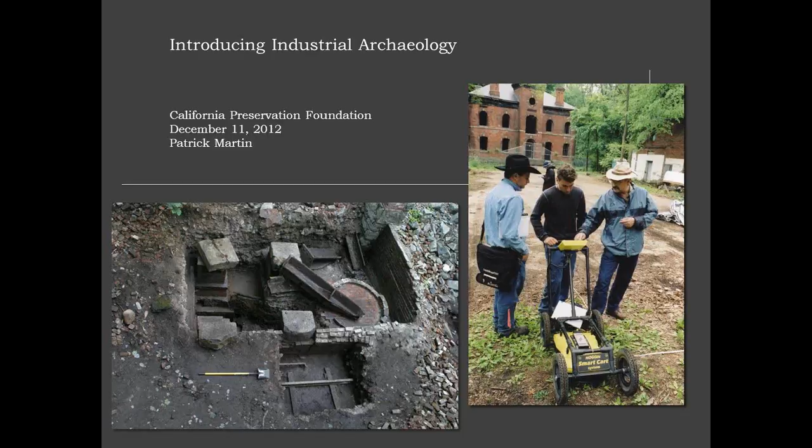Nearly 60 years passed before a serious rebirth of the term in the English-speaking world, in the context of preservation conflicts in England, centered on the destruction of symbols of England's glorious industrial past. One particular battle concerned the elaborate portico of the Euston Station in London, a struggle that galvanized citizens and indirectly led to a flurry of writing and organization around the theme of industrial archaeology.

Another significant development during this period in the 1960s was the creation of the Ironbridge Gorge museum system in Shropshire, centered on the world's first cast iron bridge, dating from 1779, a site ultimately inscribed on the World Heritage List. This preservation initiative was initially focused on standing structures and soon moved to the listing of, quote, 'monuments equivalent of castles and Roman roads,' into the National Registration System.

As early as 1955, the term was used in a publication known as the Amateur Historian, and by 1958 an Industrial Archaeology Research Committee had been created within the Council for British Archaeology, or CBA. A national record of industrial monuments was compiled, largely with the help of interested amateurs, and this new field of study was seriously launched with a number of publications and activities through the 1960s. Out of this grew several regional societies that ultimately affiliated into a national group called the Association for Industrial Archaeology in 1973.

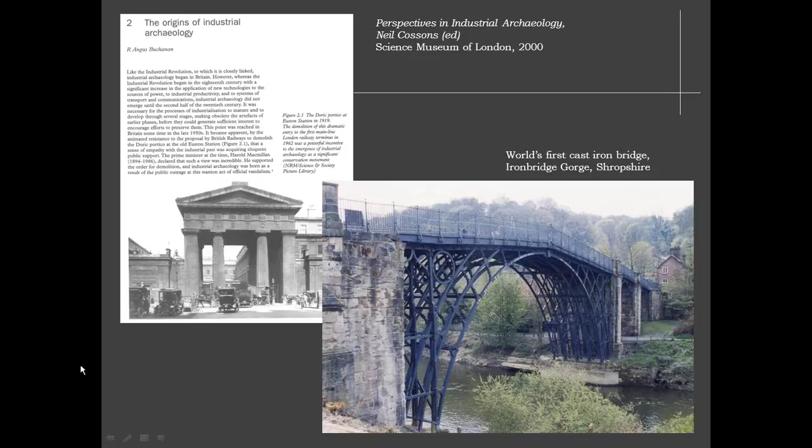I'm failing to make that slide move. Try it one more time with your mouse. Over here. Thank you.

We all know them as HAER standards and guidelines, available on that HAER website. HAER continues to build a massive database of survey and documentation data housed in the Library of Congress, accessible on the Library of Congress website under a collection that includes HAER, HABS—the Historic American Buildings Survey—and the Historic American Landscape Survey documents. These extensive materials constitute a significant research resource accumulated over decades of professional work.

It's no accident that the Society for Industrial Archaeology was founded with substantial involvement from Vogel and others in 1971. This followed closely on the heels of the creation of the Society for Historical Archaeology, or SHA, in 1967, and many of you know about SHA, I suspect. There was serious consideration of simply creating an affiliate of the SHA, but the perceived differences between the two groups, particularly the matter of an SIA focus on preservation and a focus that did not involve digging for one's data, led to the creation of a separate society.

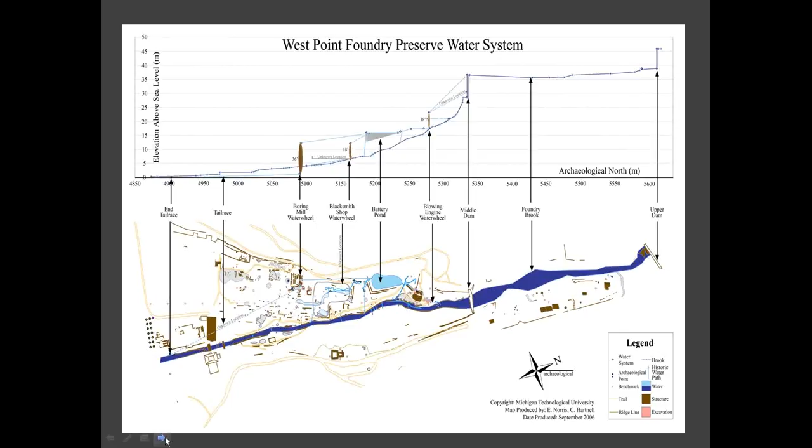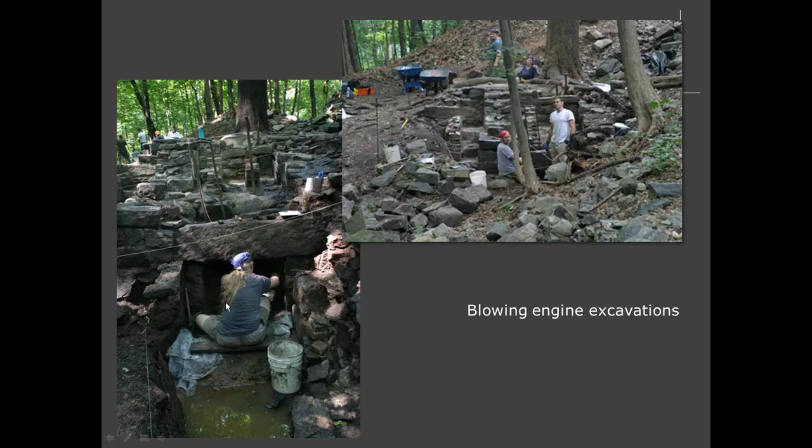Here's a modern photograph of the same area. Notice the little person sitting in this one and in this one for scale.

Subsequent analysis suggests that this arrangement reflects careful management of resources, allowing the wastewater from the blowing engine wheel to be combined with water from below the dam and reused in the boring mill further down the valley. It's actually a reasonable calculation.

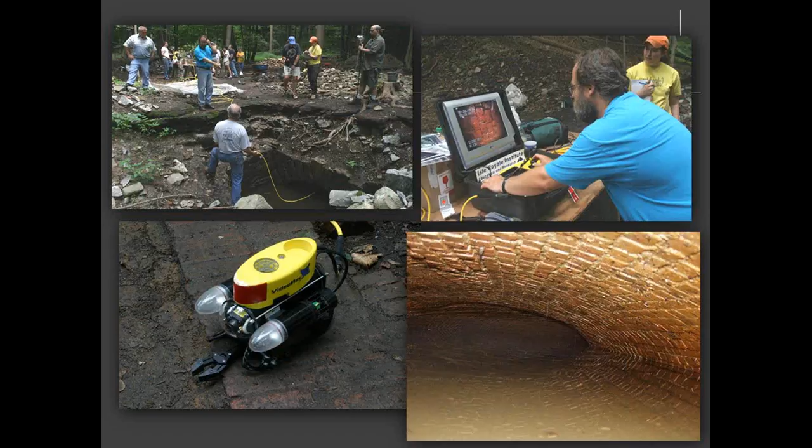From the storage pond, water was fed through an open head race into the boring mill, where it exited off a 36-foot diameter water wheel and flowed back to the Foundry Brook.

But the opening at Foundry Brook was not evident immediately. The detailed topographic survey of the ground surface in the GIS revealed that the input to the tail race was actually at an elevation below the stream bed at its nearest point, making it impossible to drain the water from the mill directly in a straight line.

After excavating the wheel pit, seen here, opening the tail race and pumping down the groundwater, we deployed a remotely operated submersible vehicle and attempted to trace the tail race path. You see some of the images below. After negotiating some turns and 50 feet of passage, we were blocked by root growth.

Meanwhile, we engaged some remote sensing, in this instance using ground-penetrating radar. GPR is an electronic technique that projects electrical impulses into the ground and carefully measures the reflected signals to identify and locate buried objects, soil layers, and disturbances.

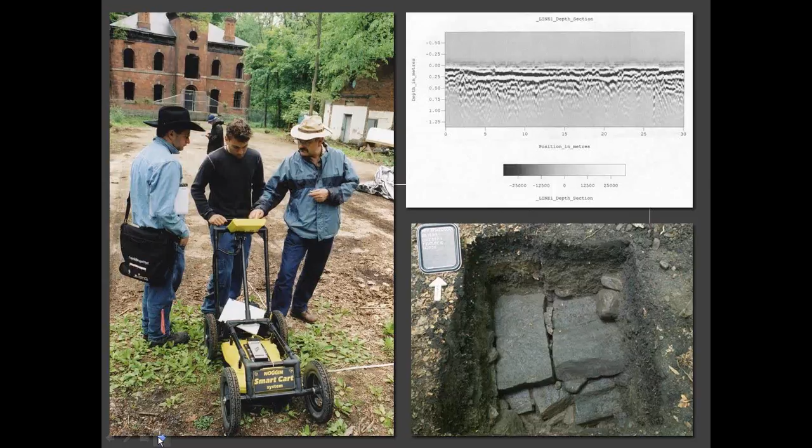The GPR identified anomalies that proved through excavation and observation to expose the nearly 600-foot-long path of this buried tail race, something we never could have done without it. Coupled with limited testing, it also allowed us to identify the extent and locations of a series of buried drains, such as this one here in the lower right.

These virtual views of underground features, followed by excavation, provided significant insights into the structural nature of this ruined and largely obscured industrial complex. Insights that were simply not possible through the documentary record.

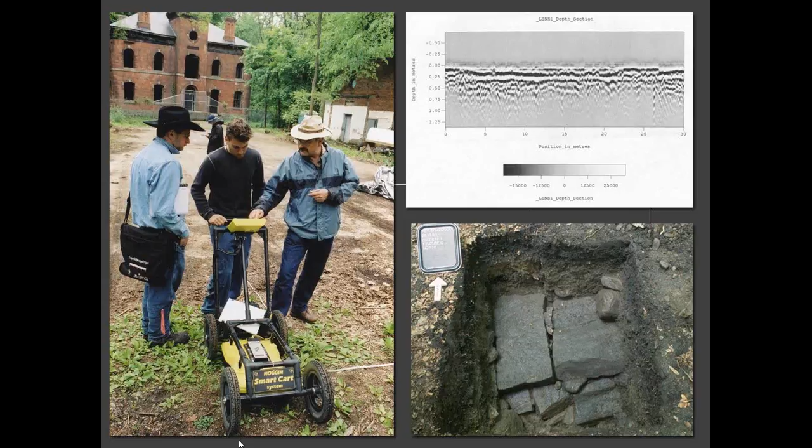In addition to these and many other research questions answered by excavation, this set of techniques has two additional fairly powerful benefits. First, the process of excavation is an excellent tool for public interpretation. Visitors love to witness discovery in real time.

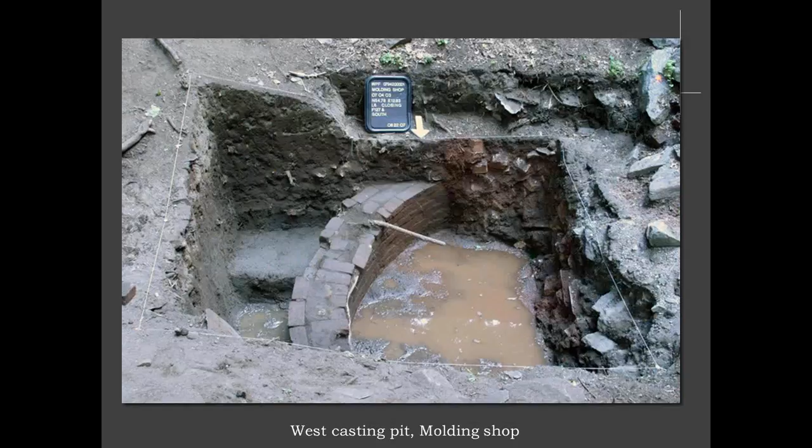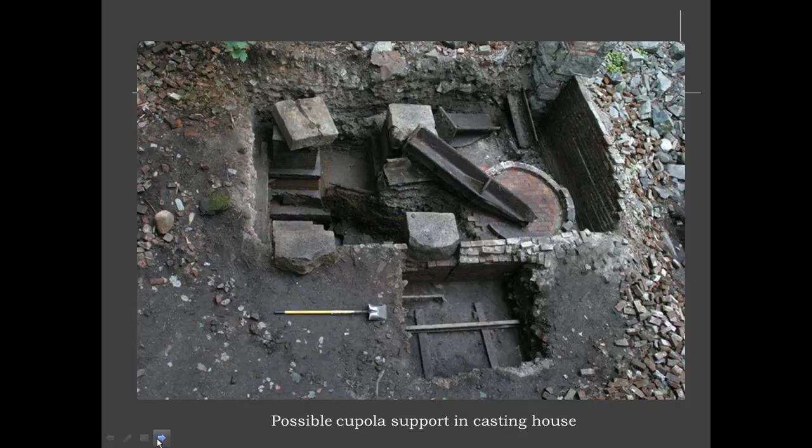First, this work is a classic case in point for that kind of phenomenon where at open house weekends, in the beginning and end of the season, hundreds of local people and citizens from the region visit us daily, fascinated and delighted at the progress. Many people expressed amazement that archaeology, a discipline that relates in their minds to the ancient past, could reveal so much about events of a more recent time and about industrial activities that lay buried beneath their feet.

While historical research takes place in an archive or an office, the active process of excavation opens a window to the research enterprise that is compelling for the public as they seek to understand the background of the industrial past.

The second benefit offered by this kind of excavation is that we simply expose the physical evidence for interpretation. These remains that you're seeing here, the base of a cupola furnace, are at this very moment being incorporated into an interpretive development of this site for the public and for perpetuity.

While simply exposing things is a little more passive than the dramatic and dynamic excavation process itself, revealing these otherwise invisible features is an important part of archaeological research.

In sum, I want to say that IA, and particularly the archaeological practice of IA, employs a powerful set of techniques and perspectives that work in the realm of compliance and in scholarship, both in enlightenment and in preservation. I urge you to embrace those techniques seriously in the future in your own work.

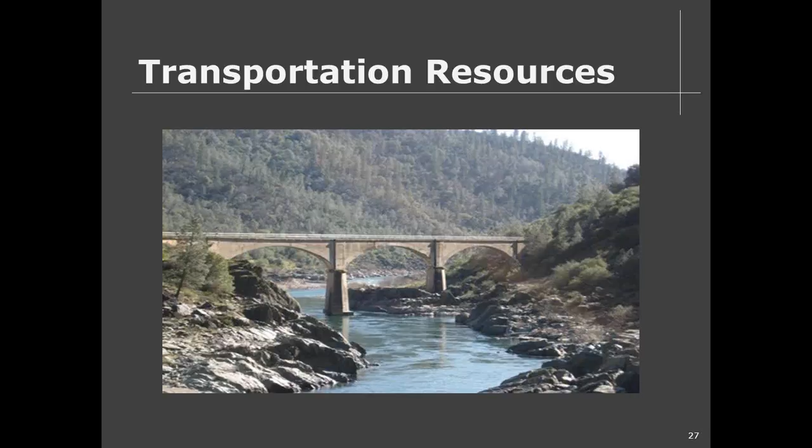Waterborne transportation included ships that went to major ports, as well as river boats that carried goods and people from San Francisco in the earliest years up to ports like Marysville and Sacramento. There's very little left of those transportation systems, and one of the really fantastic examples is the ferry building in San Francisco, which falls into that second category of resources, things built to a very high architectural standard for the purpose of branding, both the city of San Francisco and the ferry systems that used this building.

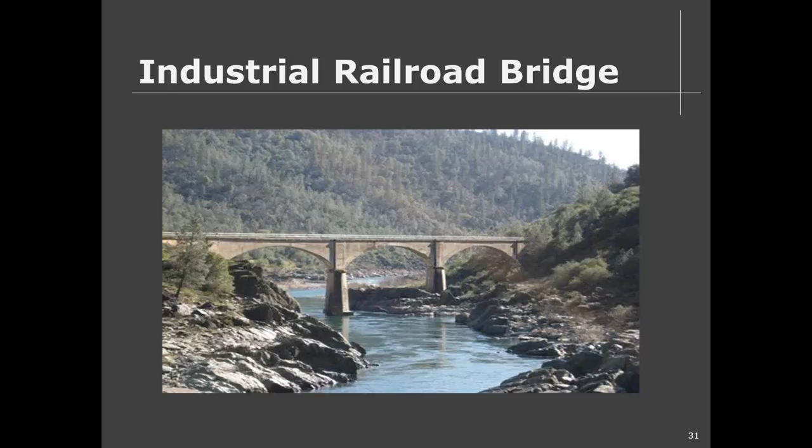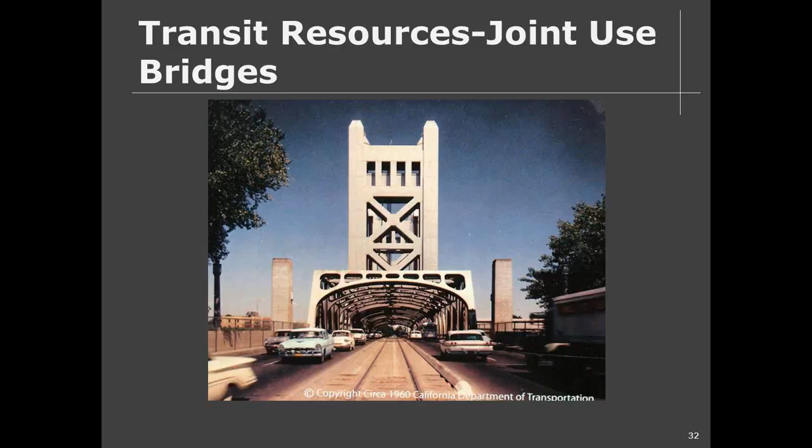Transit systems left even fewer resources behind because the level of durability wasn't the same as with railroads. You do have some—this is the Tower Bridge in Sacramento, about three blocks away from the I Street Bridge. You can see this from the 60s, I suspect, when it still had the Sacramento Northern electrified transit system running down the middle, as well as cars running both directions on the outside. Otherwise, very little remains from transit systems.

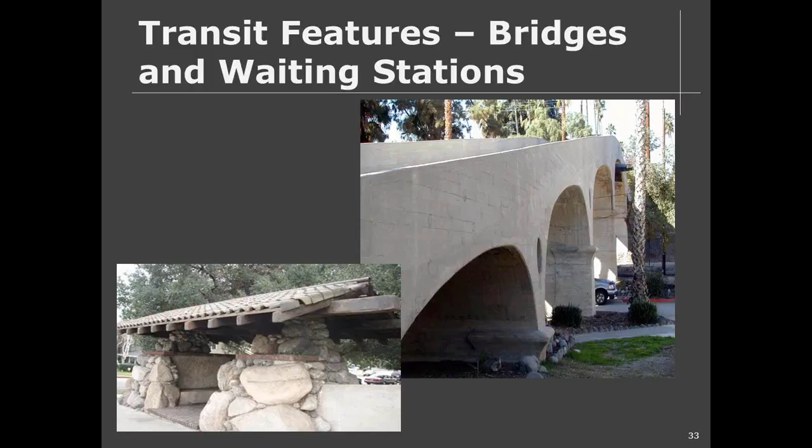The next branch of transportation is highways, which is what you're probably most familiar with—our principal mode of transportation today. Bridges are the most durable and in many cases the most beautiful parts of the highway transportation system.

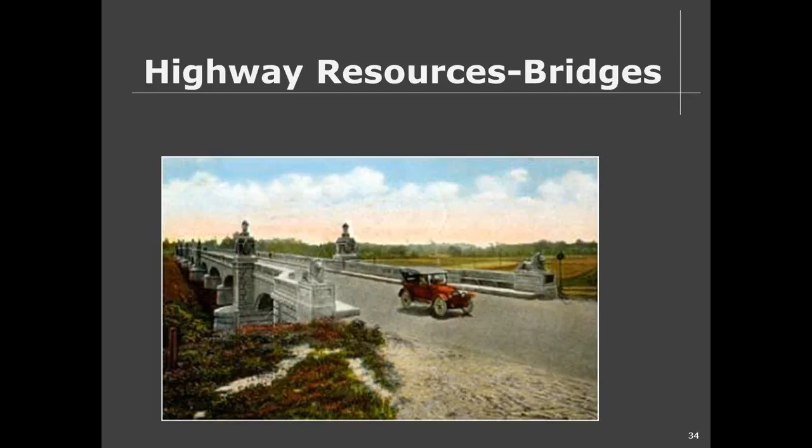This is roughly a 1915 view of a bridge, probably just shortly after it was built. This bridge is still in use and still exists, looking almost exactly the way it does in this picture. This is going across the Tuolumne River in downtown Modesto—a nice bridge. Other durable resources include retaining walls, which include tunnels.

This is the Stockton Street Tunnel in San Francisco, which has some literary merit in the sense that this was the location where Miles Archer was shot in the Maltese Falcon. You have to read the book; this is true.

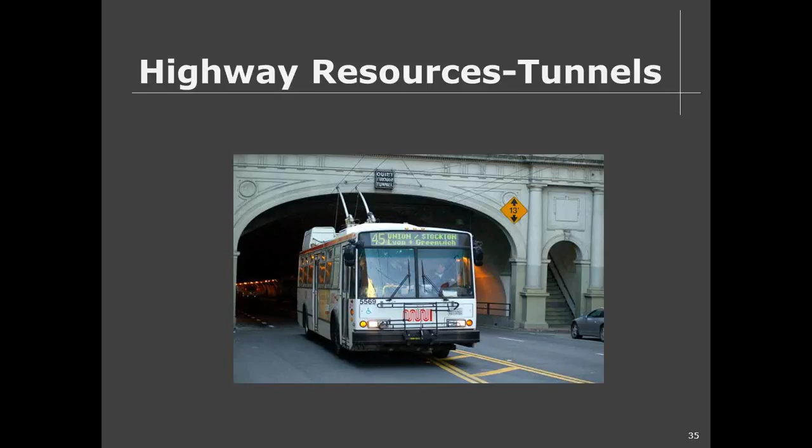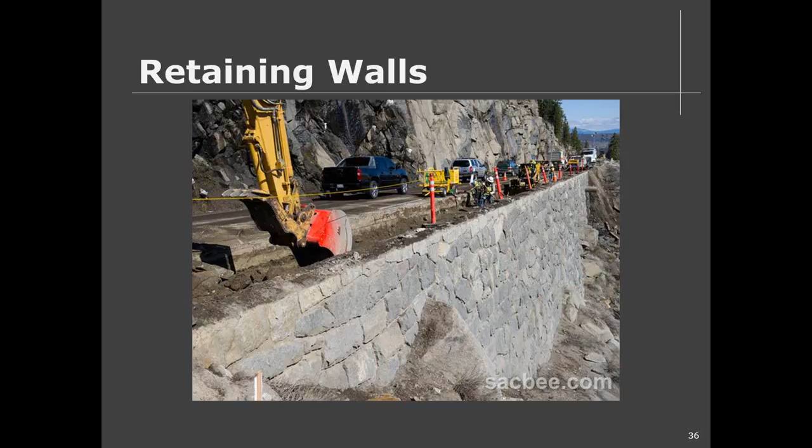Another durable element of the highway system is retaining walls. You don't think much about them, but they're built to last, and they're really very lovely to look at. This is right at Echo Summit, headed down to Lake Tahoe on US 50. Caltrans did a wonderful job of retaining the original stone masonry aspects of the retaining wall while building a big concrete wall behind it, and the structure looks very much the way it did before this repair work was done. Caltrans has done some really excellent work here and there.

So even though transportation resources tend to be found only in isolation, here and there it has been possible to preserve an entire system so that you get the feel of the entire system as well as the function of the entire system. So the question is, how do we retain historic character of a system while providing necessary maintenance? I guess the answer really should have been very carefully, or it's extremely difficult and extremely rare.

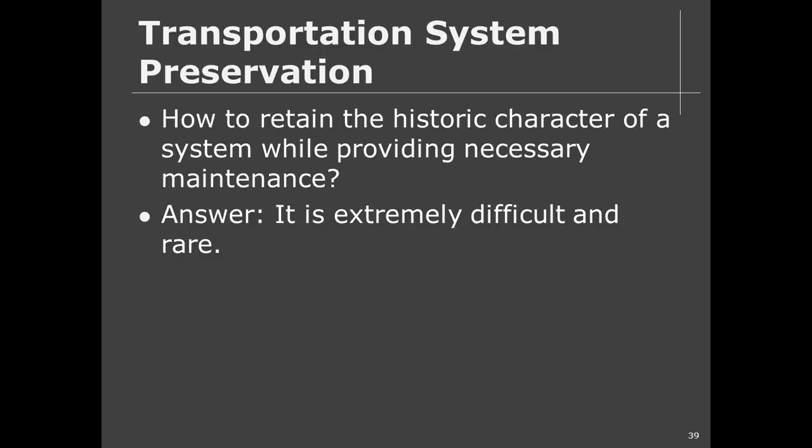I will give you two case studies, one that has been completed and has been highly successful, and that is the preservation of the Arroyo Seco Parkway. The Arroyo Seco, or what's now generally called the Pasadena Freeway, is one of the most important highways in the United States. The Californians say that it was the first freeway. People in New York disagree with that, but it's certainly one of the first true freeways to be built in the United States. It was really a lovely piece of engineering as well as a lovely piece of architecture.

In the last decade or so, Caltrans, the California Department of Transportation, realized that it needed to fundamentally upgrade this facility, from repaving to work on the bridges to the retaining walls, the entire system. Because it had been listed in the National Register, Caltrans decided to do the right thing and rehabilitate it consistent with the original design of the resource.

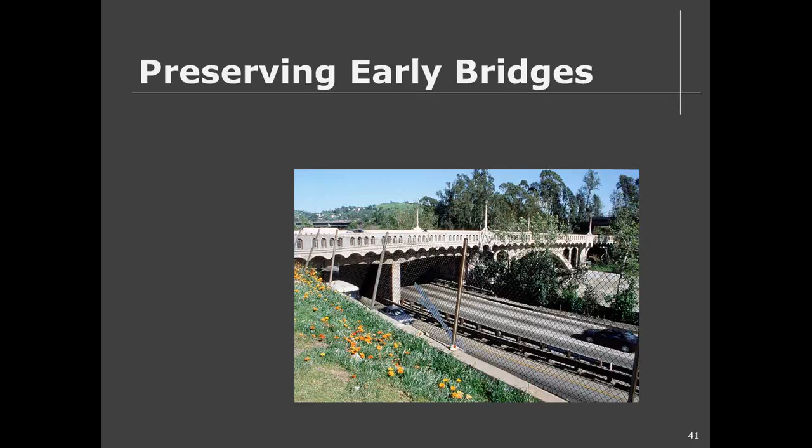The original design included the early bridges, which were built by the city of Los Angeles, which had a long tradition of making very sturdy and beautiful bridges. The bridges you see in Los Angeles look like this, designed by the city, while the bridges you see in Pasadena were designed a little later by the Division of Highways, the predecessor of Caltrans. The engineers mimicked these very much after the bridges on the Autobahn in Germany. Even though this bridge is now 60 or more years old, it feels very modern because it was very much the prototype for modern freeway overcrossings.

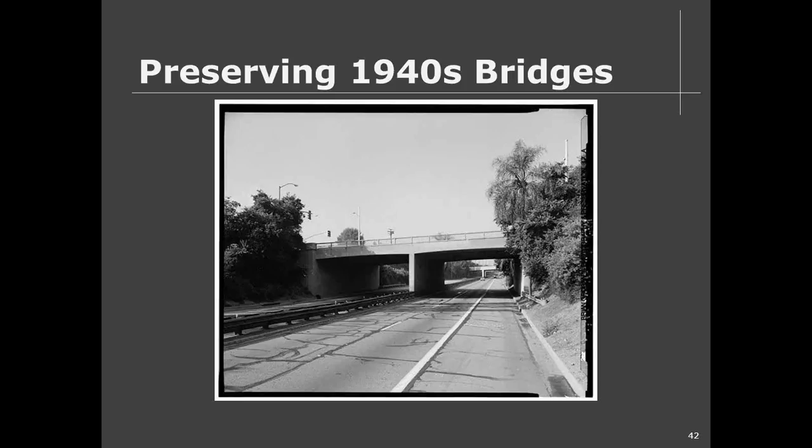So Caltrans has preserved those old bridges and has redone the pavement and the landscaping in a manner that's consistent with the original landscaping, and it's very much something that people should be proud of.

Another case study that might work, and I hope it will, is an effort to reopen the old Northwestern Pacific in Sonoma and Marin County, called the Sonoma Marin Area Rail Transit. It will be primarily a passenger line, but they will also run freight trains on it. It's a system that has only been out of use for 10 or 20 years, and it's possible that there still are a lot of remnants of the old Northwestern Pacific. The depots are principally in place, and the bridges are mostly in place too. So while most assuredly they will build a modern system with concrete ties, welded rails, and so forth, I hope that they will be able to preserve the feel and the function of that old line.

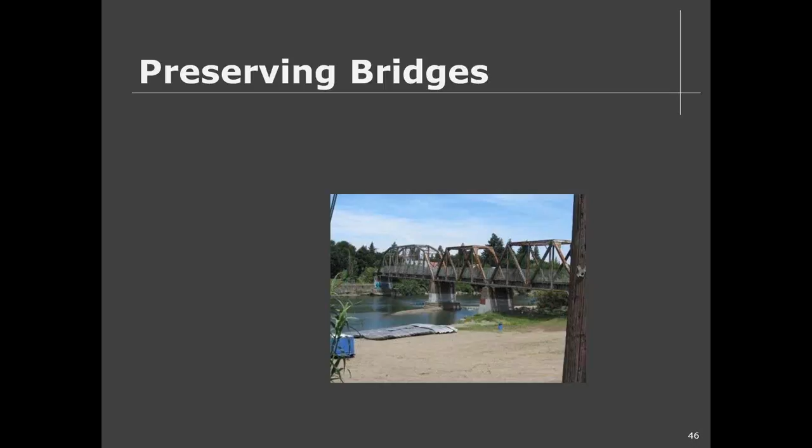So that's about all that I have to say about transportation systems, and I will say thank you.

Thanks, Steve. I'm going to talk more specifically about manufacturing resources, focusing on Southern California. So more specifically, I'm going to speak about identifying manufacturing resources through field survey and through the multiple property documentation approach to field survey and evaluating historic resources.

This is based largely on an approach recommended by the National Park Service as a framework for evaluating the eligibility of thematic groups of historic resources for designation as federal, state, or local historic resources. So the multiple property documentation approach organizes evaluations into historic contexts and then defines property types which represent those contexts. It facilitates an evaluation because it allows individual properties to be compared with resources that share similar physical characteristics and historic associations.

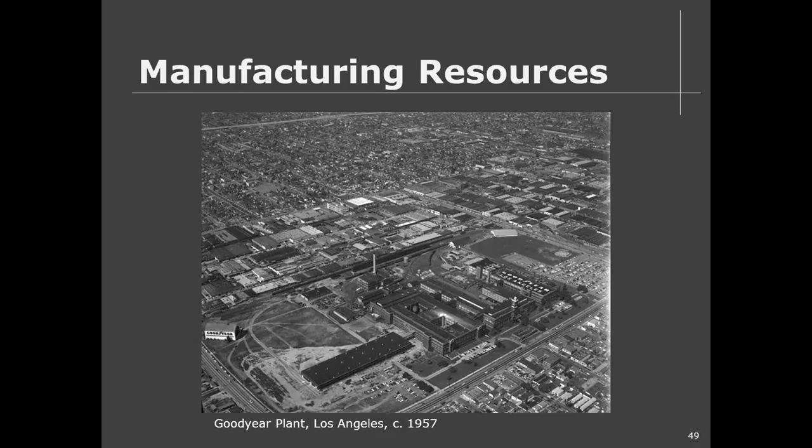In terms of property types related to manufacturing uses, there are two basic factory property type uses. The first is generic single-story workshops, where a succession of small industrial manufacturers would come in, bring their own tools and machinery, and transform their own rentable workshops. These are usually concentrated in industrial districts along freight rail corridors.

A good example of this is the Goodyear tract in South Los Angeles, which was an industrial tract located next to the Goodyear Tire Company factory, and really served as part of the supply chain for this major tire manufacturer and the automobile industry, with small workshops for plastics, paint, and radio.

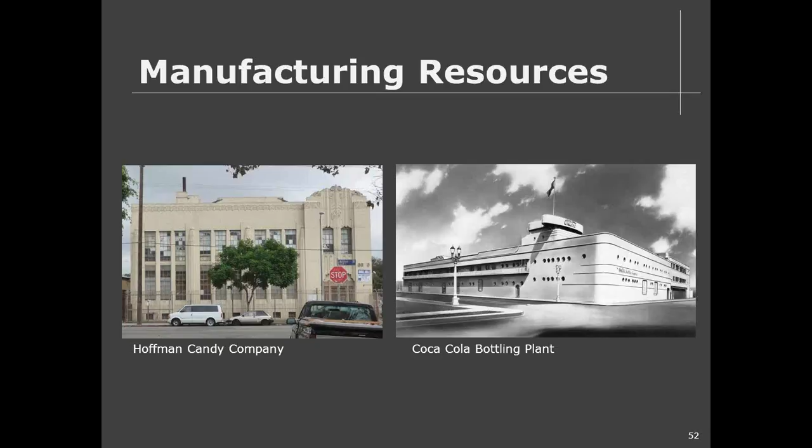Then there are property types related to a particularly innovative industrial design or engineering type, architecture intended to improve the manufacturing process. There's the daylight factory, with industrial steel sash used to increase the amount of glazing and natural light to improve the manufacturing process.

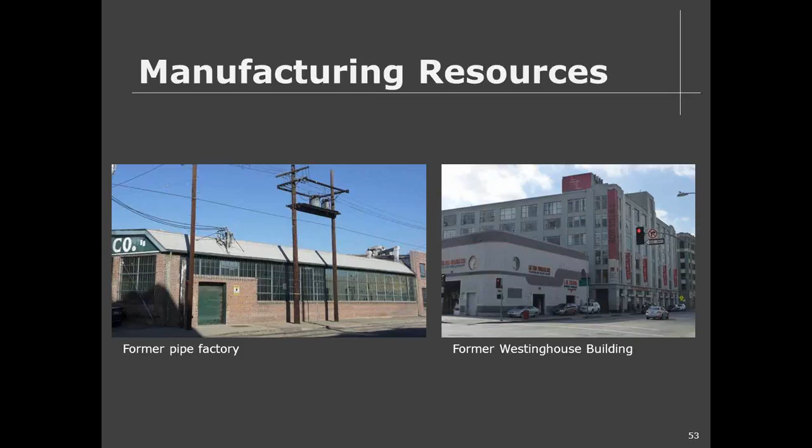Because industrial buildings had to respond to really unique conditions of manufacturing - things like adequate lighting, ventilation, fire resistance, reducing vibration and noise, and efficient workflows - you can frequently see the manufacturing process expressed through the architecture.

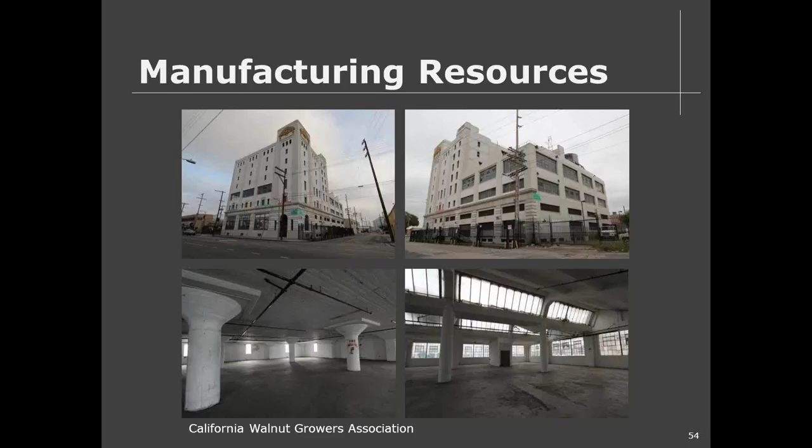So after that overview of property types associated with manufacturing, I wanted to talk more specifically about a detailed evaluation of a single resource, and the ways that an understanding of the history of the manufacturing process and a more fine-grained examination of the development of the site over time can inform an evaluation of eligibility of a particular resource and preservation planning for the future.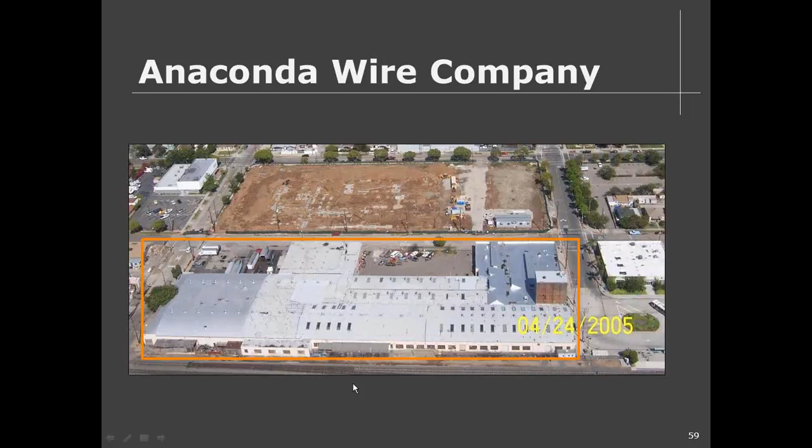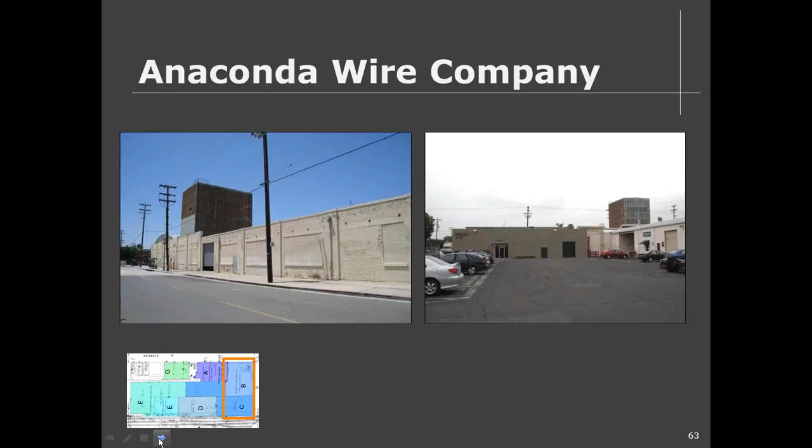This is the interior elevation. The rail spur would have run right here through the site.

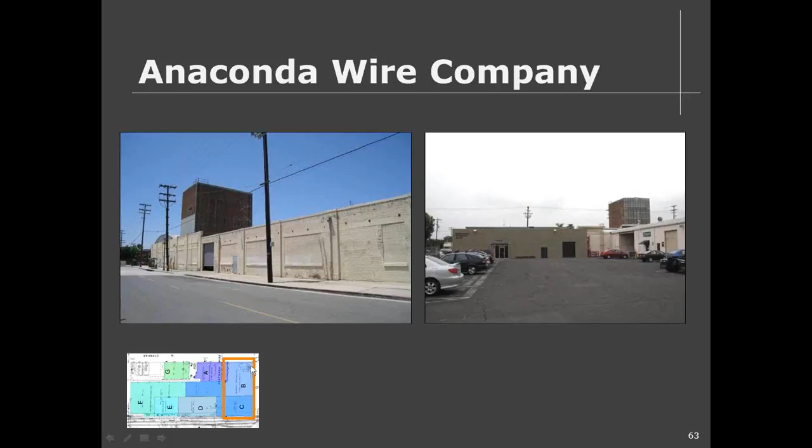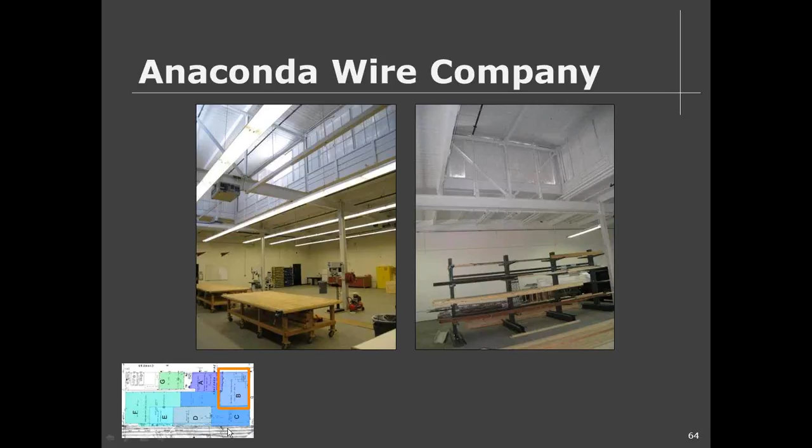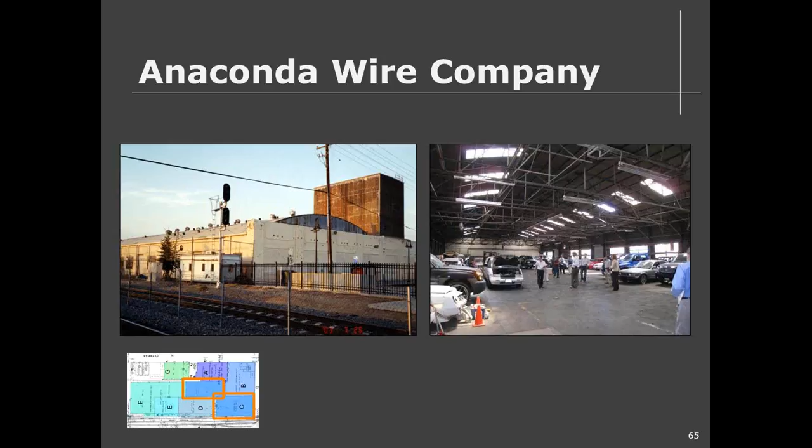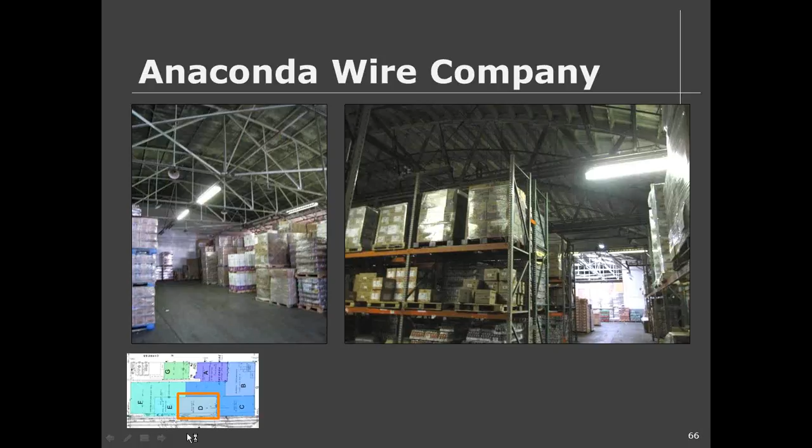Section D is connected on the interior with Section C, but was developed in the 1950s, an expansion of the wire mill and cooling processes.

And then this is the building as it was developed in the 1950s. You can see much smaller windows, less of an emphasis on daylighting in this newer section of the building, closer to a controlled conditions facility.

So as part of our understanding of the development site and the manufacturing process, it's really used to help us understand what the significant spaces of the building were. And we created a three-tiered classification system looking at the primary significance—spaces that are essential to convey the property's historic use and its original physical character.

Secondary significance: the space that contributes to the historic character and retains a moderate degree of integrity in that character. And then tertiary, which minimally contributes to the historic context and retains a lower degree of original physical character.

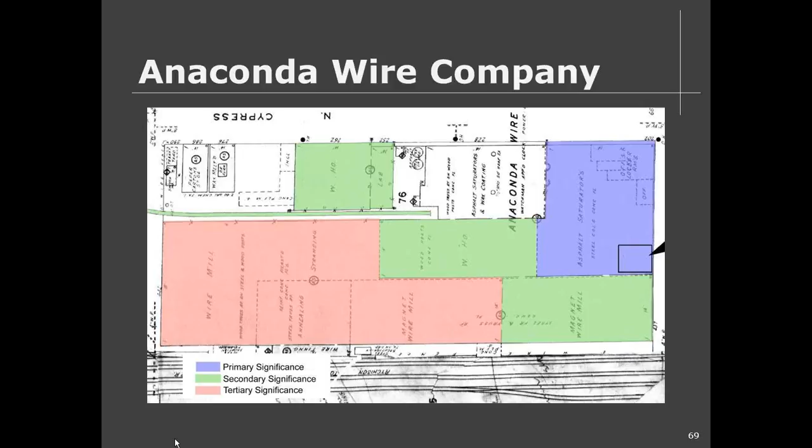So thank you. I think Jennifer is going to handle the questions.

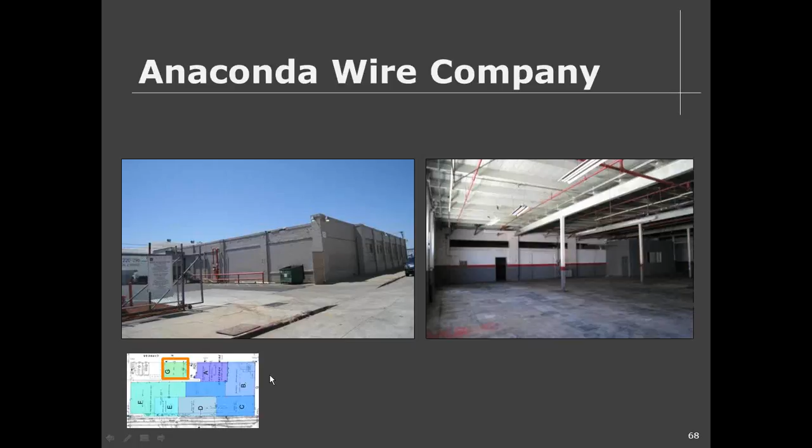Well, I'm going to that slide on resources. Another question that came up is, can speakers point to any case studies and or scholarship related to energy production, such as petroleum or coal production or oil refining?

Oh boy, I'm sure there are. Right off the top of my head, down near Bakersfield, in the town of Taft, there's a wonderful museum to the oil industry that's right in the middle of oil wells everywhere. And there's a beautiful oil museum in a town in Ventura County.

Oh, Marissa, you can help me with it. It's Santa Paula. Oh, right.

I'm sure there's an SIA member who's working on some oil stuff in California. His name escapes me at the moment, but if any of you wish to follow up with an email, I'd be happy to dredge that information out. There's a lot of published stuff in general on coal and oil, and some fantastic sites in the eastern U.S. that can easily be visited.